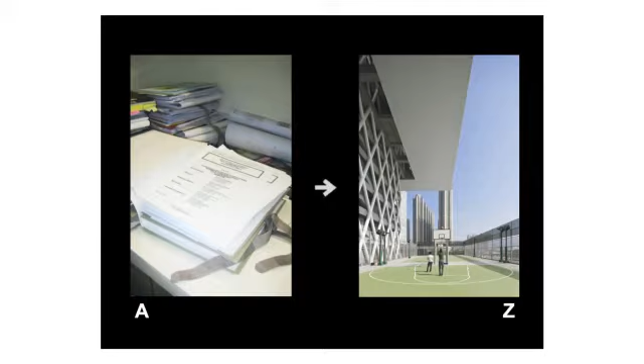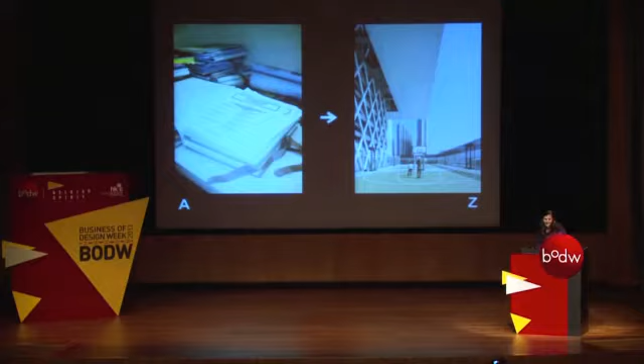The process from going to point A to Z, the first step towards the final product, towards the final building, I think that process is also pretty contradictory. Because in the beginning we receive this brief, which is not always very inspiring. We can ask ourselves, is it tiring or inspiring? So how does one retain some of the creativity and the fun in order to get to the final goal, create a unique building?

We have analyzed our process of conception and we have discovered several phases. The first one for us is we employ an extreme attention to the site. This natural condition can be nature, a beautiful forest or a beautiful hill, but it can also be a very urban situation. So we analyze the site, we analyze its direct environment and its larger surroundings. And what's very important in there is the personal experience, our personal experience, we mingle with that.

So the first impressions you have, it may make you think of a movie you saw or an exhibit you did last week or maybe a childhood memory. We think that these first impressions are very important and they give you a first direction, maybe a concept to work with.

This we enrich afterwards with various project factors that come out of the programmatic analysis. These are often too very contradictory. And all these elements, we bring them together to a point of overlap. And in the end, we add another layer, which is kind of an organizational system. We bring in some kind of a logic to find some kind of a structure. And these elements all together configure some kind of a project matrix, which we like to play with. And this helps us to come up with a valid project proposal.

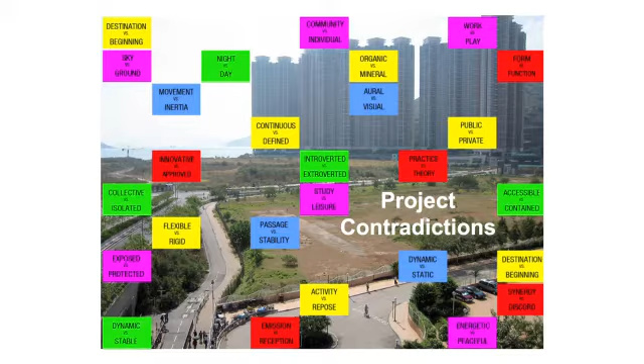We mingled with those first impressions all the project contradictories. For example, the client wanted different departments that all had their own identity, but they needed to have some kind of a synergy between them also. And what we could have done then was putting all these elements together, create a project that was merely determined by the urban constraints. There were a lot of them, and one of the biggest one was the height limit of 55-meter height. And then we could have just applied some kind of a facade onto it and have more of a facade architecture. All this would have created quite an ordinary building.

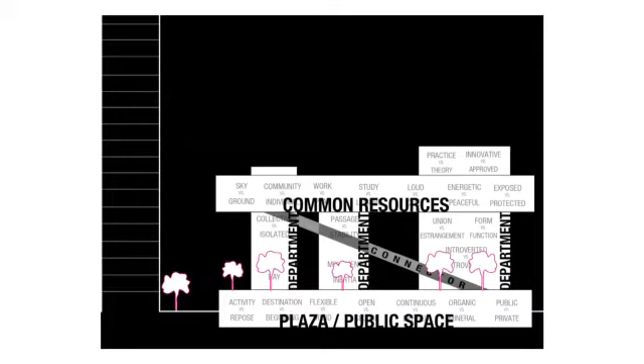What we liked to do was play with the program, challenge the brief, and we divided the program. We tried to look for which functions needed to be separated from each other, which ones needed to be shared, which ones needed to be linked with the public. And that's how we created a project that for us challenged not only the brief, but also the current urban situation of Hong Kong, where you often have podiums where people mix and mingle, but then they all isolate themselves in the towers. So for us, it was all about creating this moment up in the air and having a base that was very much about porosity and where people could go in and discover.

I'll show you this movie first.

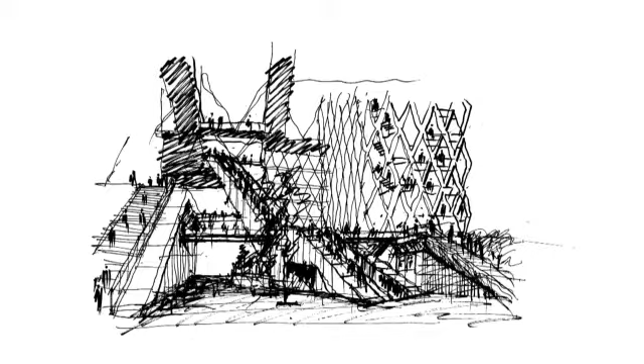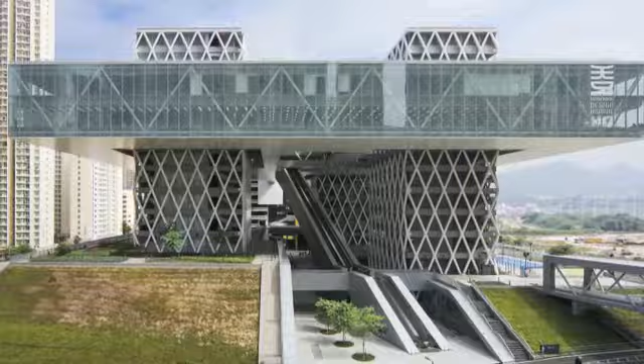6 mois après notre installation, on a choisi de participer à un concours d'architecture internationale, celui de la création de l'Institut de Design de Hong Kong. Ce bâtiment participera au développement culturel et au développement des formations professionnalisantes des jeunes hongkongais, avec une ouverture sur l'international importante. Fin 2006, quand on a été lauréat du concours, on a fait le choix de localiser notre équipe sur place. Nous-mêmes sommes allés habiter 5 mois sur place pour développer les études et faire face aux clients.

Le bâtiment se trouve dans le quartier de Tiu Keng Leng, au nord-est de Hong Kong. C'est un quartier plutôt à vocation résidentielle et commerciale. La particularité du contexte urbain hongkongais, c'est la hiérarchisation et les contrastes qui sont opérés entre l'échelle piétonne, l'échelle de l'habitat, l'échelle des commerces et l'échelle des activités.

Tout ça fonctionne un peu par strates, par couches, ce qui crée des désordres urbains un peu palpables et qui manquent parfois de synergie entre les éléments. On trouvait que le bâtiment était une opportunité de recréer des nouveaux rapports urbains pour rompre avec une certaine habitude de hiérarchisation assez radicale des fonctions.

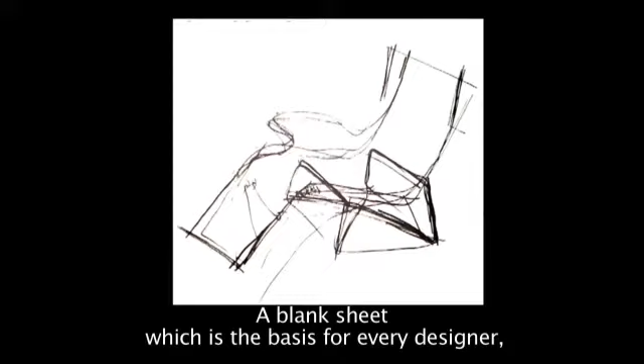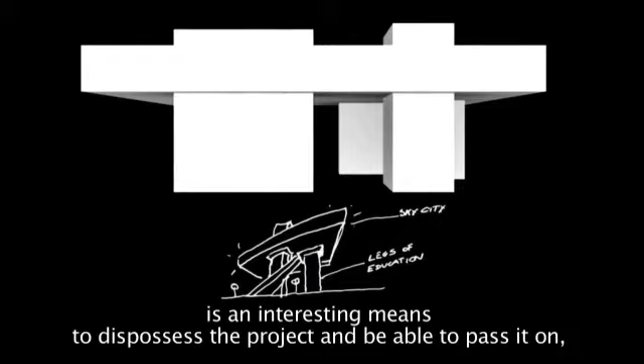Pour ce concours, on a utilisé une métaphore, la feuille blanche, qui est le moyen de base pour chaque designer. C'est ce qu'il utilise au début de chaque mission pour commencer à créer quelque chose. C'est un peu l'idée de l'éducation qui supporte le monde des idées. L'idée d'utiliser une métaphore en architecture, pour nous, est un moyen intéressant de se désapproprier le projet et de pouvoir le transmettre, pour qu'une autre personne, un utilisateur, un client, raconte l'histoire du projet, le comprenne, juste en expliquant les raisons de sa composition volumétrique.

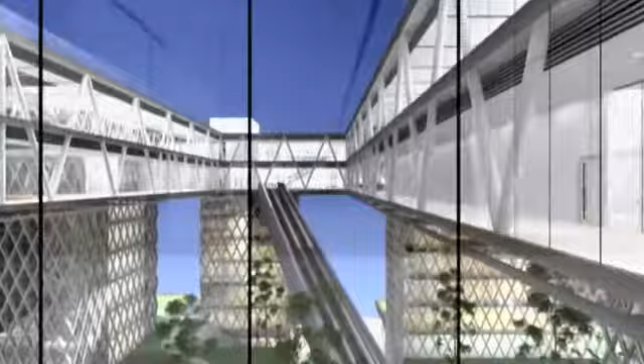La structure des tours est en acier treillis et porte non seulement les dalles en béton armé des tours elles-mêmes, mais également la structure de toute la plateforme qui est en saillie par rapport aux tours. On voit à travers la façade les poutres dont les diagonales transpercent tout l'espace afin de porter ces grands porte-à-faux. La composition même de l'architecture induit des qualités naturelles.

On peut voir la grande plateforme qui protège naturellement des ensoleillements ou même des pluies fortes, puisqu'à Hong Kong le climat est quand même assez rude, humide, et il pleut très fortement régulièrement. En même temps, le bâtiment, par les différents décalages de chaque tour ou les vides créés entre les volumes, crée une sorte de fraîcheur naturelle avec des courants d'air qui sont créés.

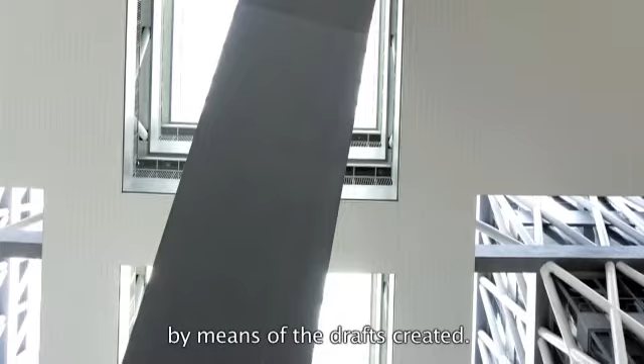Il s'agissait de composer le bâtiment selon des contraintes très fortes, celles de la hauteur, puisque nous étions plafonnés à 55 mètres, ce qui crée un rapport d'échelle assez complexe. On voulait que notre bâtiment soit une résonance à ces éléments structurants de la ville, qui sont pour nous la verticalité, mais aussi le paysage.

Cette plateforme qu'on a véritablement soulevée du sol pour la poser en lévitation sur les tours, elle permet de décupler les vues depuis la bibliothèque vers les collines, mais aussi vers la baie de Hong Kong.

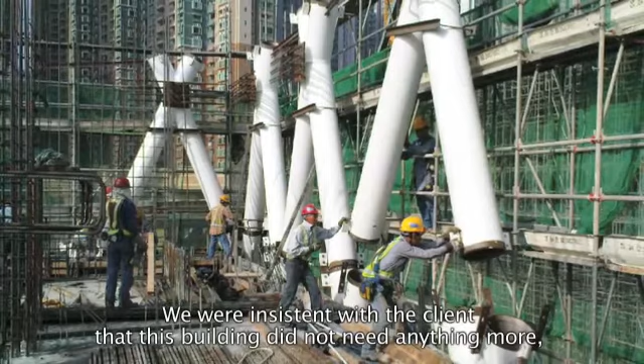On a fortement insisté auprès du maître d'ouvrage pour le convaincre que ce bâtiment n'avait pas besoin de plus que ce qu'il était, c'est-à-dire de s'exprimer au-delà des matériaux qu'on proposait : béton, verre, acier, les matériaux essentiels pour concevoir ce bâtiment. Ce qui était très difficile puisque la culture locale impose souvent que les choses soient assez fortement renchéries de décoration, de maquillage, de suppléments qui rajoutent des couches supplémentaires permanentes. Nous, on a plutôt insisté pour travailler avec les entreprises, pour obtenir une finition la plus adéquate possible et révéler le squelette du bâtiment.

On se trouve dans ce bâtiment de manière quasiment systématique, dans des espaces semi-intérieurs, semi-extérieurs. L'implantation de ce grand escalator qui relie les éléments est une sorte presque de clin d'œil à ce contexte de la ville hongkongaise.

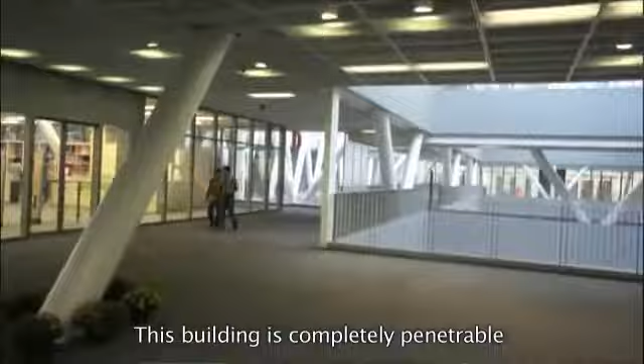Ce bâtiment permet d'être complètement pénétré et de laisser la ville continuer à travers lui. Ça a été une réelle interrogation de la part des utilisateurs : comment est-ce qu'on peut se sentir dans une université proprement dite avec un bâtiment aussi dilaté, aussi ouvert ? Et nous, on leur a expliqué que c'était vraiment la clé de la réussite de ce programme.

Ça se passe vraiment comme nous on avait espéré, dans le sens où ils s'approprient tous les différents espaces et les utilisent dans tous les sens. Et c'est vraiment comme ça qu'on l'avait conçu.

The next project I want to share with you is the Versatile Tower design in New York. I lived for 2 years in New York, exploring this fascinating city, living not too far from Central Park in the Upper West Side, a vibrant city with a beautiful skyline, day and night.

I worked there in the offices of Richard Meier, and so walked to work every day and discovered the city, the New York City grid and the New York City blocks. Our life there inspired us to reflect on the existing urban fabric, so we decided to participate in this skyscraper competition. The site is the West Side Rail Yard, which was at that time much spoken about because it was a site where the Jets decided to build their stadium.

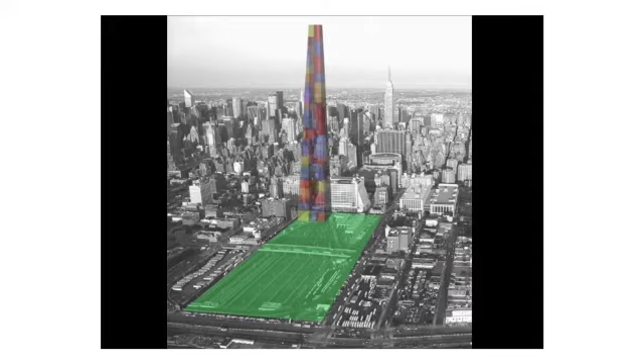Our first thinking was, let's create a continuity of the existing urban fabric throughout our site - just continue it, use the same height, and create a mixed program onto the site. But we think the architect also has a social responsibility and needs to reflect on life quality versus city density. That's why we preferred piling up the same floor area in a vertical way, thus creating a park called West Park, a pendant of Central Park, for this district and its inhabitants.

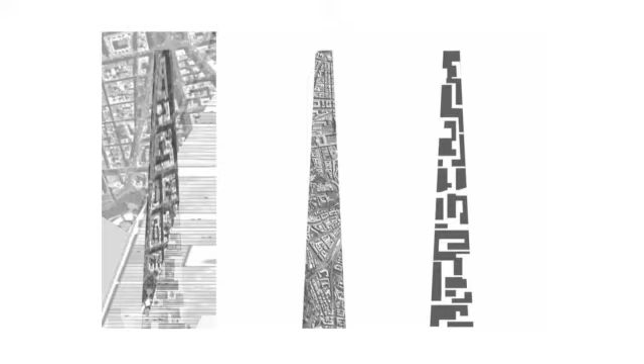With this design, we aim to provide a vertical reproduction of its horizontal environment. It was made up of a mixed program of squares, streets, public places, and landscape, just as you can find in a normal horizontal city.

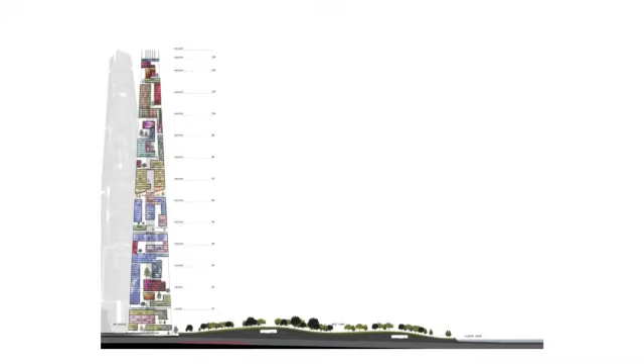This vertical transcription defines a kind of new urban fabric, and it's brought to life just as in a horizontal city, by people walking from one street to another, through the gardens, through the public spaces. So the user, by working or living or circulating in this vertical way, discovers a new way of living - a vertical way of living, but actually quite close to the horizontal way of living.

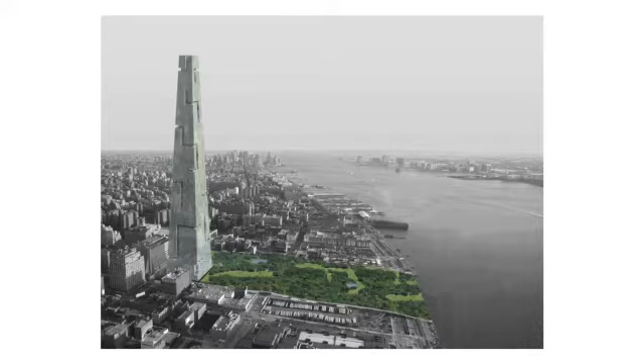This is how our project looked, because we like to think from the inside of the building and show on the outside how it's organized inside. These facades show a little bit how the streets are inside, how it's organized at day, but at night also we lit up the streets just as normal streets are lit up at night.

We think buildings like this, if you create them in a city, really become a landmark. They become important and contribute to the visual culture of the city. So we propose, for example, that the building could contribute in showing - if there's a Roy Lichtenstein exhibit at the MoMA, then this building could show it to all the people living around.

Next project is the International Conference Center in Ouagadougou in Burkina Faso, Africa. Burkina Faso is a country that is relatively peaceful. If you look at all the countries surrounding it, they have quite some political tensions, and Burkina Faso often has a pacifying role in this.

Ouagadougou is a quite random city, with a warm climate, a lot of drought, and rural areas very close to the city center. The city center is quite chaotic, with cars, motorcycles, bikes all mingling among each other. But when visiting, we did feel a very warm atmosphere - people are very welcoming, and that's what we wanted to feel in our project.

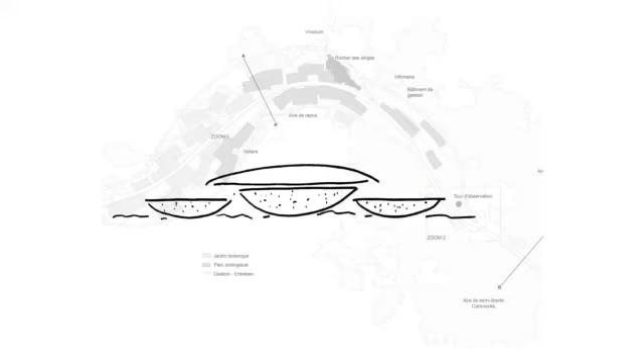So we based our project on an ancient tradition, the calabash fruit. It used to be cut in half and offered to people as a welcoming sign, to give water to welcome them. We used this as the main inspiration for our building, which we thought was appropriate since this Congress Center had the goal to receive all the surrounding countries to talk about peace.

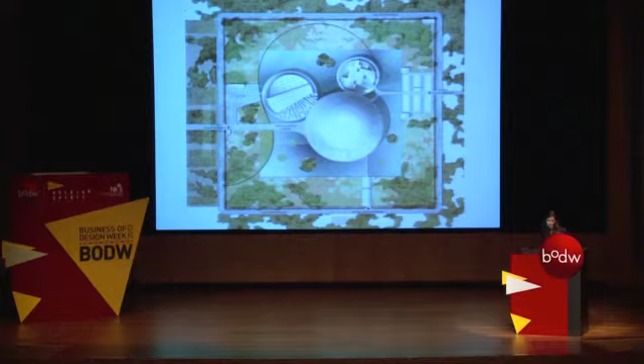The complex was situated in a large park, and we proposed a building made up of 3 buildings linked with one another. The main one had an auditorium for about 1,000 people, and then a VIP pavilion and a banquet pavilion. The architecture was mainly formed with pure volumes, soft curves and circular elements, and the 3 pavilions were linked together by circular infinite pathways which communicate some kind of fluidity.

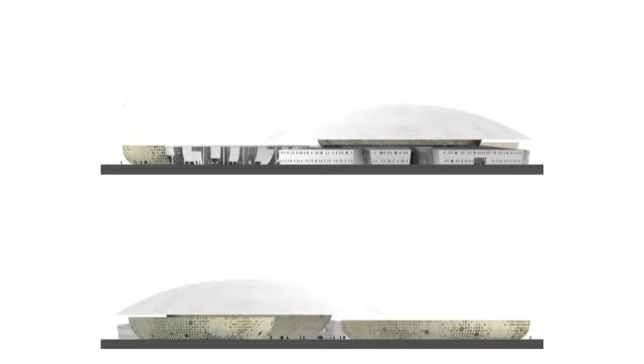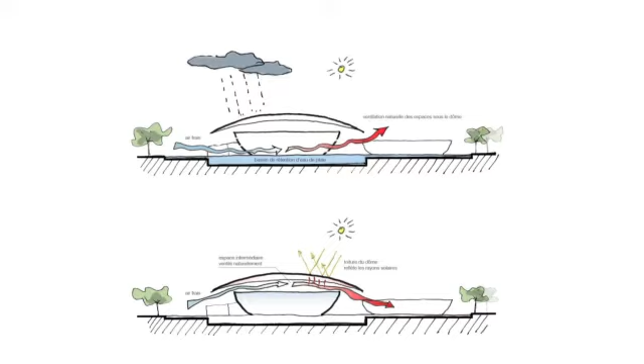We worked with the idea of a double skin. The 3 pavilions were wrapped with a double skin, referencing the calabash fruit, which was often decorated and painted on. So we provided a perforated, decorated concrete skin around each pavilion to protect from the heat, plus a huge parasol protecting from the sun and the rain. This composition of the 3 calabashes and the main roof provided cross ventilation, contributing to giving coolness to the users.

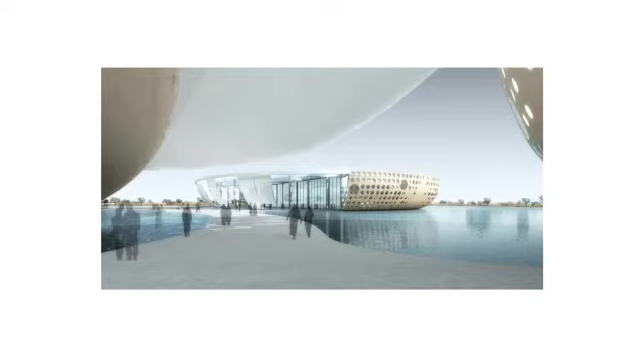The next project I want to share with you is LOHAS Park project here in Hong Kong. We were asked by MTR to look at their LOHAS Park development, which is situated on the east side of Hong Kong. LOHAS is the abbreviation of Lifestyles of Health and Sustainability.

This project was more a research and development project we worked on for a year. MTR asked us to have a look at this development. At the time when we were commissioned, it was already being built, part of it, and they asked us to look at how we could apply sustainability to this site.

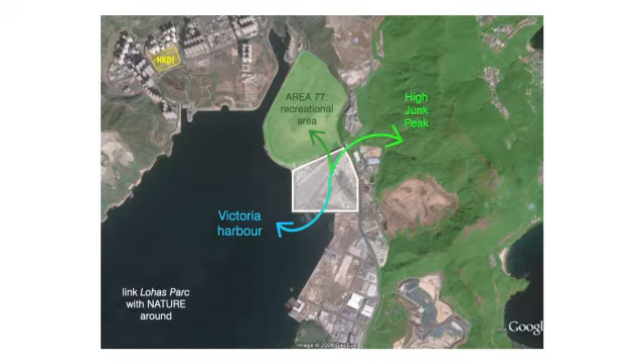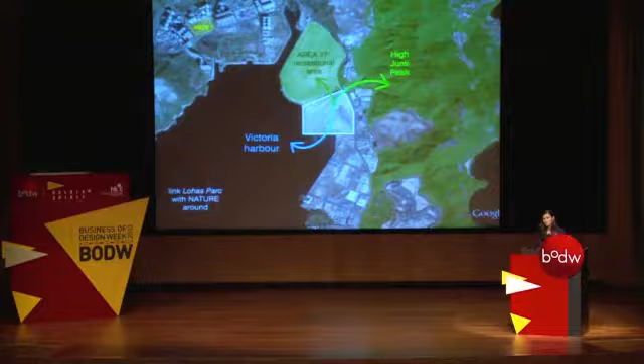So we looked at Hong Kong and said, well, Hong Kong has a lot of open space, a lot of beautiful nature. You should try to get this nature into your site, because the site is surrounded by some quite beautiful nature. There's the water, there was some recreational green area around, there was also a High Junk Peak. So we said, why don't you try to look a little bit behind or above your site boundaries and try to get nature into your site.

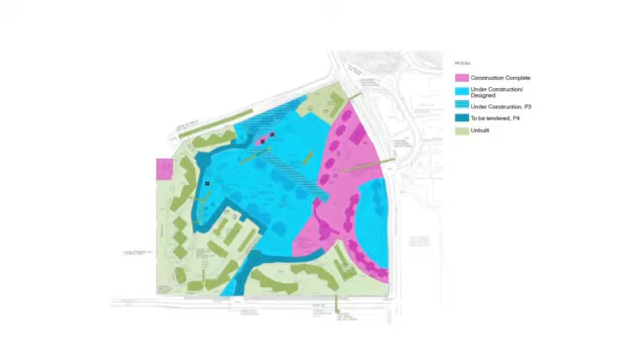So we encouraged them to get the nature from the mountains through the site towards the water. This is the plan of the site when we started to work on it. All the pink was already constructed. There were about 50 towers that needed to be erected on the site. The blue was under construction and the green was not designed yet.

So we told them, let's create this green corridor that goes through your site in order to enhance biodiversity on your site.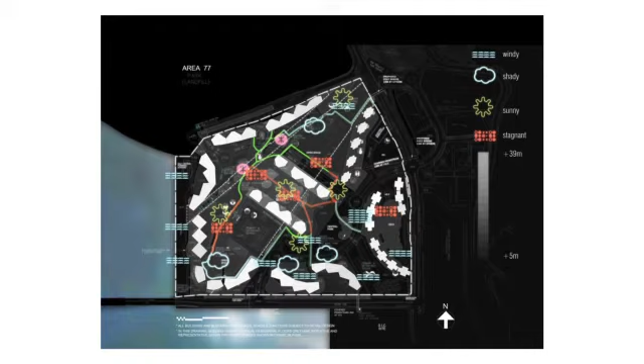And we did this climate study on the site, which showed that there were zones where it was too hot or too shady or too windy because of the composition of the towers. They were sometimes blocking off the wind or redirecting all the wind through a certain spot.

So we proposed to them to create a couple of nests throughout the site, nests that would be there to protect the people and to encourage people to use more the outdoor space. And these nests would then, for example, protect them from the wind or protect them from the sun.

But these nests were also there to attract little fauna and flora, so we could increase the real presence of nature in the site. Because we think in general in Hong Kong, all the landscaped parts are quite manicured, quite artificial. So we said, in a place that's about living of health and sustainability, let's get real nature into the site. So we worked for a year on this.

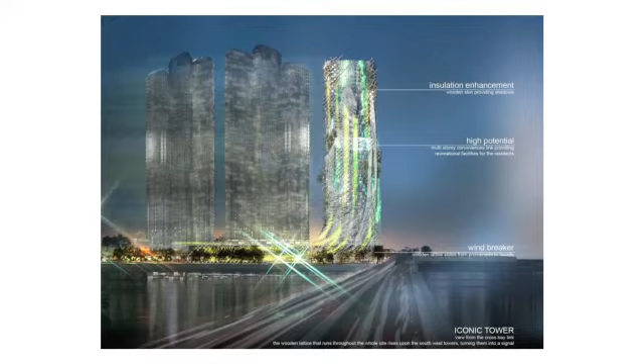We had a whole booklet of proposals. I'll just show a couple of them to you. First one is that we proposed to make the buildings on site sustainable. We thought it was quite essential, if you have a sustainable site, that the buildings on it are sustainable too.

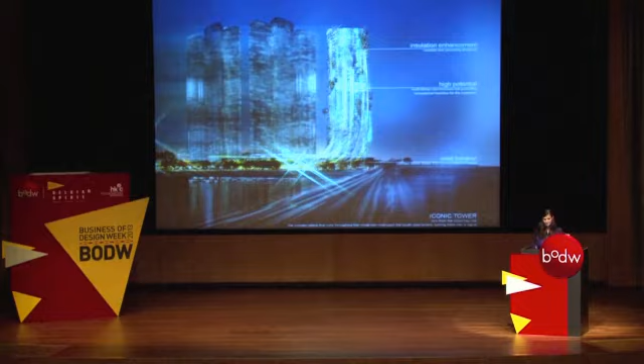So we proposed to envelope the existing buildings in some kind of a second skin. It's a little bit like putting on a jacket. This skin could give the opportunity to create pocket parks or greenhouses for certain apartments, and would also serve as some kind of an iconic image, which could have been seen from Cross Bay Link.

We also developed these micro-architectures in different scales, not only as large, but at different scales. This is one of the pavilions, smaller pavilions, where people could shelter from the rain or the sun. They could take some information on the ecological approach of the site.

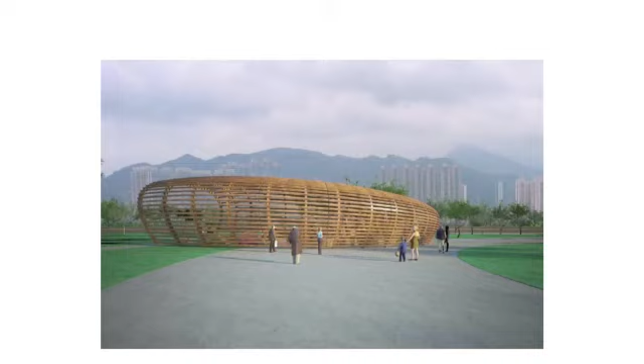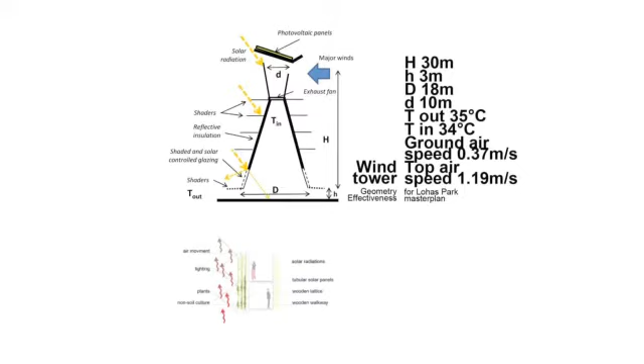And this is the wind tower we developed on site, which had the purpose to diminish the temperature at the base of the tower by 3 degrees Celsius, just by creating this natural ventilation. There were solar panels here, which would make this turbine here function, and this would create natural ventilation, and this would lower the temperature outside.

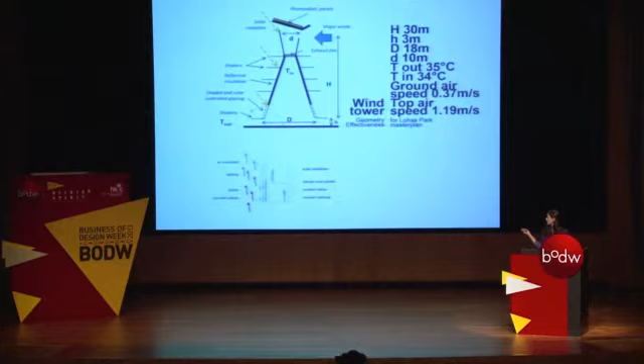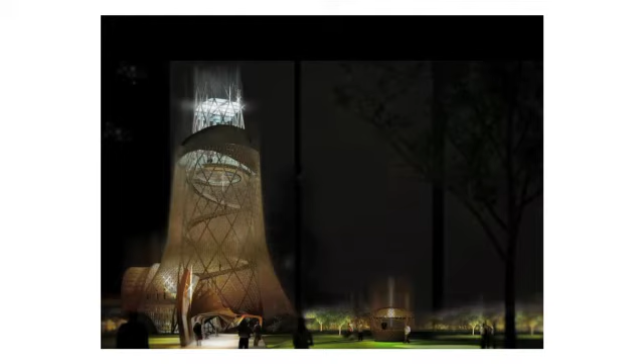So all these features would have encouraged people to enjoy outside living. And that's how the tower looked like. I don't have that much time anymore, so I'll cut it short.

Two more projects. This one is the West Kowloon Air Clouds. It's a proposal we thought about since Hong Kong is part of all the cosmopolitan cities that have very dense activity and have problems of air pollution. And as we all know, plants can have a quite purifying function.

So we were saying, okay, there's a West Kowloon Cultural District located right in front of Hong Kong Island, which has the ambition of creating a place that's well equipped, open to everyone, and announces at the same time the city's wish to become an important cultural place. But has anybody, or Foster, thought about how treating the existing air extraction buildings that are positioned on the site?

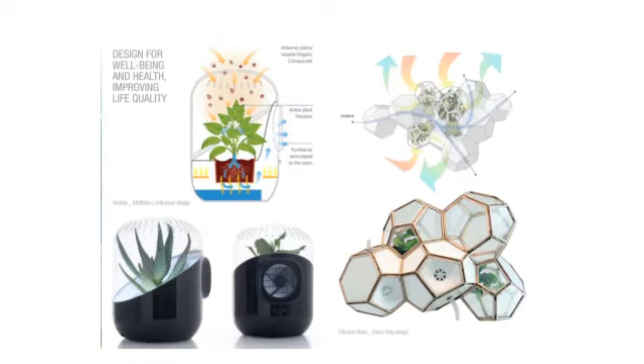So we were inspired by a design that is used to improve air quality in apartments for residents. We said maybe we can use this on a larger scale. So we proposed to wrap the extraction building into these air bubbles.

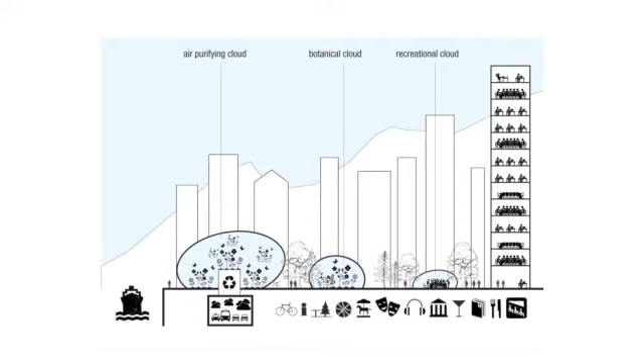These air bubbles would be filled up with plants that could help purify the air. We thought maybe we could plant a couple of them in different shapes and forms, and they can all have different functions.

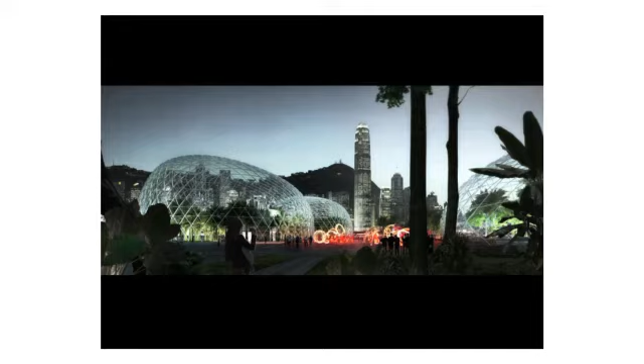Some can be purifying, others botanical, others recreational for holding weddings or other events. And that's what they look like. So we thought these could not only help Hong Kong purify its air, but also serve as some kind of iconic thing positioned in West Kowloon, showing the whole of Hong Kong Island is doing something about its air quality.

I'm just going to check. I think this is going to be the last one.

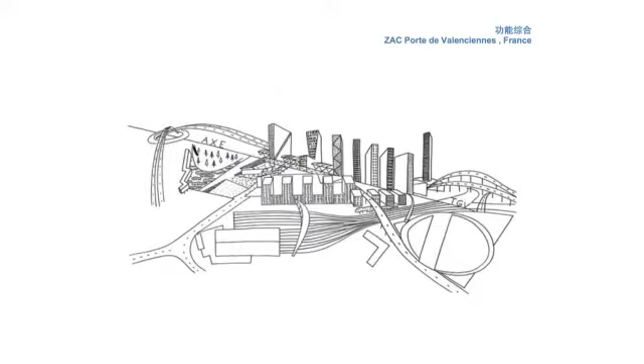It's a mixed-use project we did in the northern part of France. The building is implanted in a master plan designed by OMA, by Rem Koolhaas, and the volume was pretty much set.

It was situated partially on this boulevard with quite some traffic, and also on this street, which was a little more intimate with less traffic. So we worked with two strategies.

The first was to work with a module that we declined in several ways according to the exposure of the facades and the functions behind them. For example, it was developed in a smooth way where we had offices behind, so the office building faced the traffic boulevard.

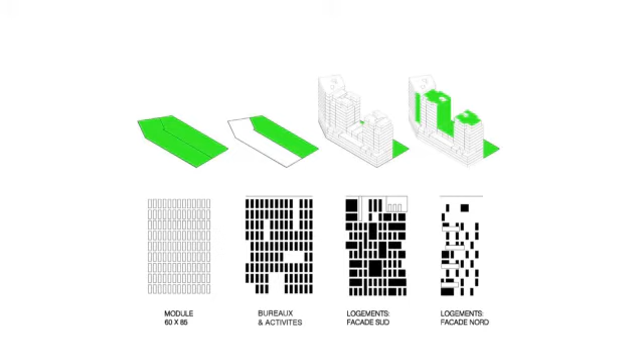When it came to the residences, we declined this module, deformed it, changed it, and created a double skin on the south facade so people could have terraces behind it. On the north side, it was much more closed, protecting the building from the cold.

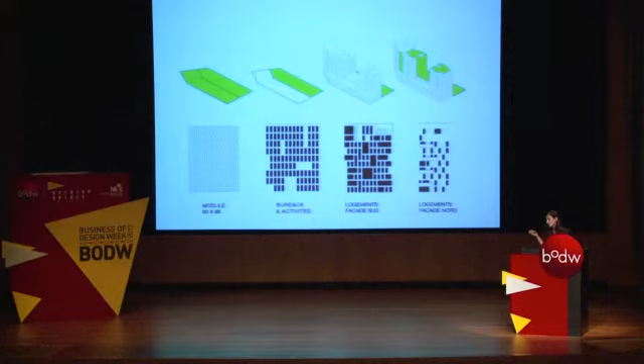The second principle was this green footprint. We wanted to give back to the building the green footprint that we took away from nature by building it, so we added this green onto the building.

So this is the facade: the office tower and the residential apartments. The office tower is treated quite smoothly, the residences have a much more porous facade, and the north facade is much more closed to prevent the cold from getting in.

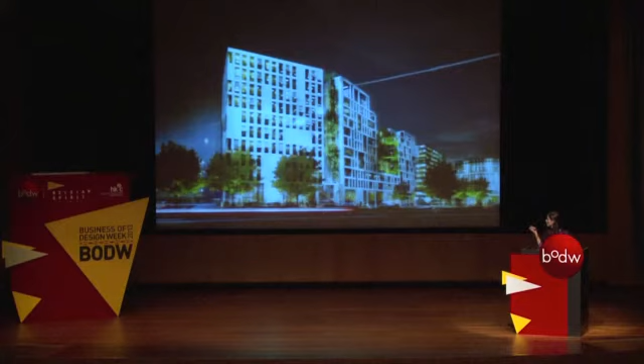To separate the several functions, we added greenery. Between the offices and the residences, we added a greenhouse, not only to add green onto the site, but also to help warm the air in the offices in winter or cool it down by opening it up and creating natural ventilation.

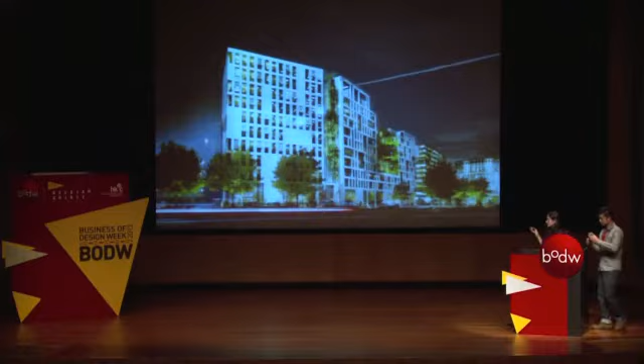We added a green vertical garden and a communal garden in the residences. These vertical gardens aren't the expensive kind designed by Patrick Blanc, but a pretty basic version.

We provided on every terrace a planter with plants inside, and these plants are watered by rainwater through a drop-down system. We collected rainwater on the green roofs and it drops down, so tenants don't have to do any maintenance or watering.

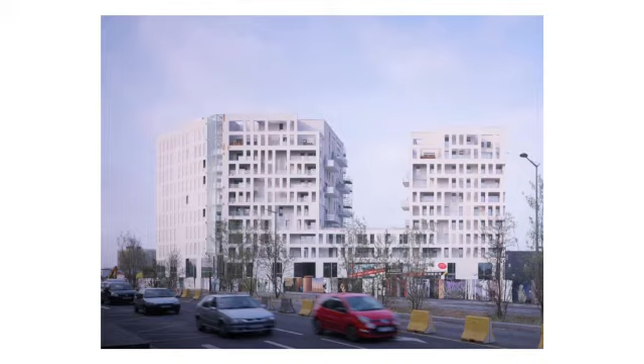This is how it looks today. We opened it a month ago. You're seeing here the south facade, which is much more porous, creating this filter and a kind of intimacy with the balconies behind.

This is the offices at the head of the building, facing the boulevard, and the greenhouse separating the offices from the residences.

This is a Taichung City Cultural Center competition we participated in recently, and we unfortunately lost, but we do think it was a good idea, so we wish to present it to you anyway.

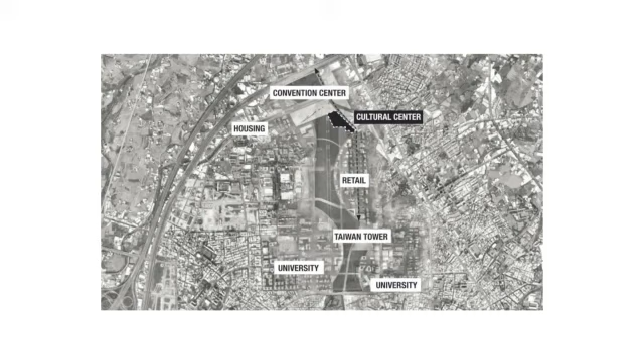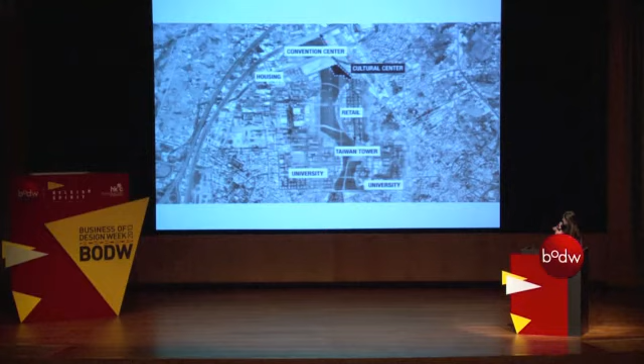The site was located on the perimeter of this huge park, which was an interesting situation because the building needed to create a link between the park and an urban situation. On the other hand, it also created a kind of gateway to this new area, where there was going to be a convention center and the famous Taiwan Tower.

The questions we asked ourselves were: how can one create two distinct institutions that make up a unified identity? Because the program of this cultural center was on one hand a library and on the other hand a fine arts museum. How can we conceive an urban building within the perimeter of a park?

So we went through this whole exploration of different design approaches, and in the end we thought the thing to do was create two different elements, but they needed to have a link between them.

So this is the final proposal we worked with: two distinct buildings, and between them some kind of linking element, a tectonic element, that was not only creating a link between the two programmatic elements, but also creating a link between the park and the city.

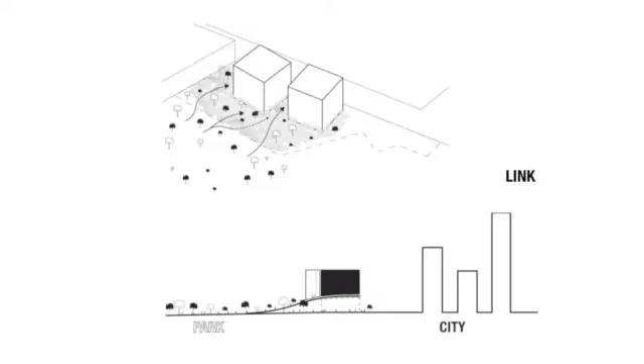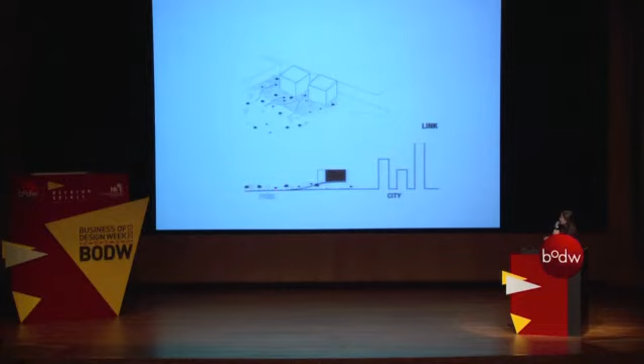So we created this porous project so that the park and the urban situation could communicate, and it was this canopy that was linking the two buildings, the park, and the city. This canopy was making the transition between the horizontal character of the park and the vertical character of the city. Underneath this canopy, we created a public plaza, which was really the entrance plaza to both buildings.

So it's this recurrent duality that became really an inspiration for us through this project, and which we pushed much further also in the organizing of the buildings.

So to us, a library is a program that can be considered quite extroverted, because it's a place where people share knowledge, where people distribute information. In contrast to a museum, which we think is more of an introverted place, a place of collection and protection. So we worked on these two dualities through the organization.

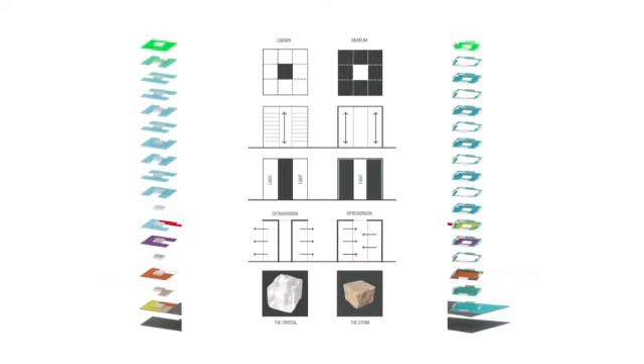So we put the vertical circulation in the middle so people could look from inside to the outside. But for the museum, all the circulation was put in the periphery, and we had this light well in the middle of the building. So people were looking to the outside from the library, and people were looking to the artwork on the inside in the museum.

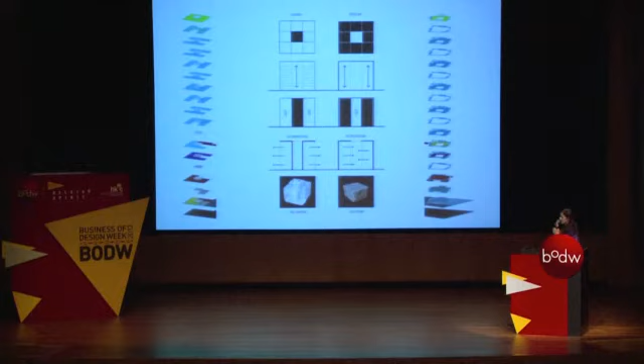So we conceived both buildings a little bit as one being the stone and the other one being the crystal. We felt this even in the facade treatment — the stone building was merely concrete, while the crystal building was a glass building. But in order to cool it down, we had a continuous flow of water onto the facade to cool the whole building down. So this is how it looked in the end.